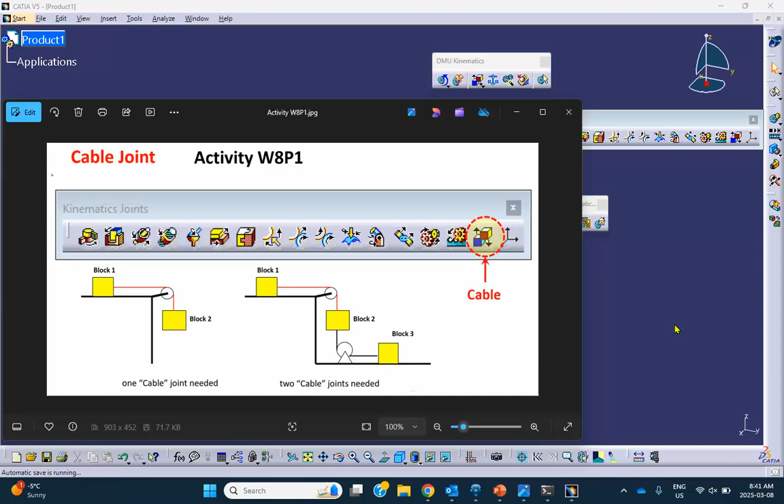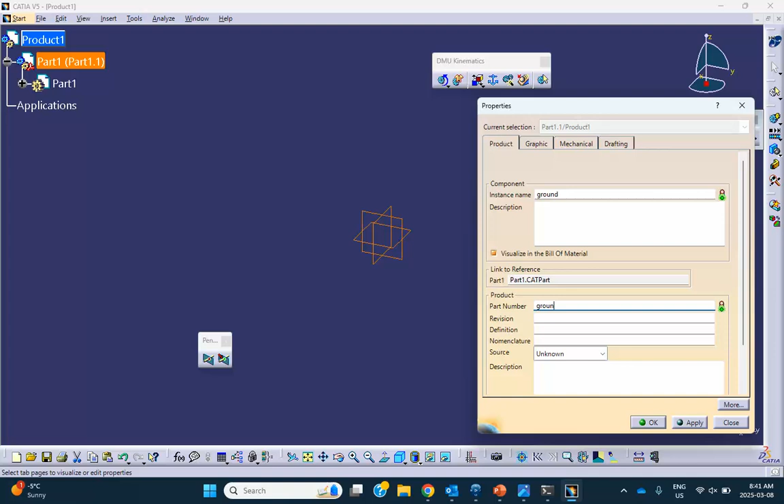So let me insert my first part, insert a new part in there. And I'm going to call this thing the ground, in properties, call it ground. And we're going to make it. So let me double click on it. On this vertical plane, I will sketch something that will be my ground, something like this.

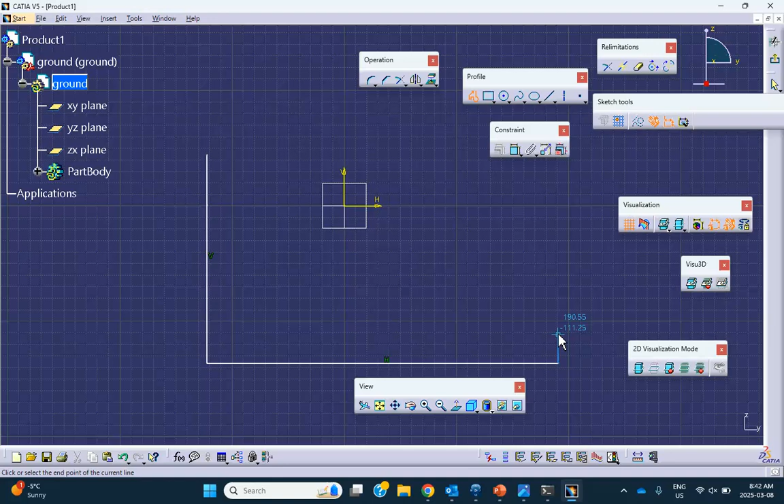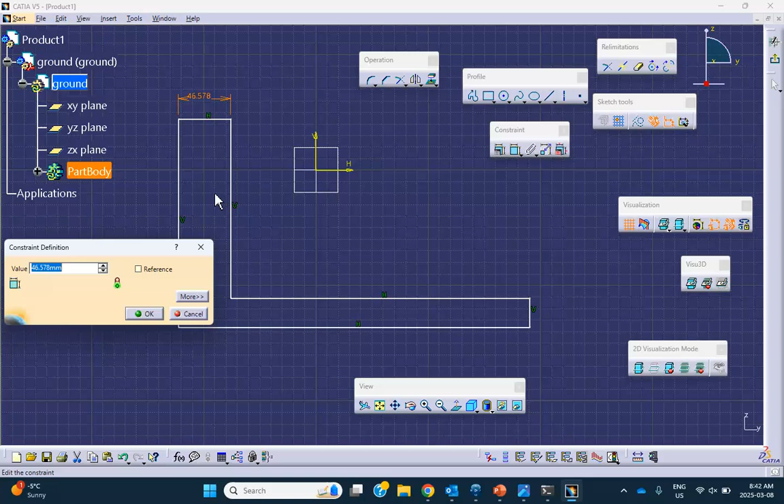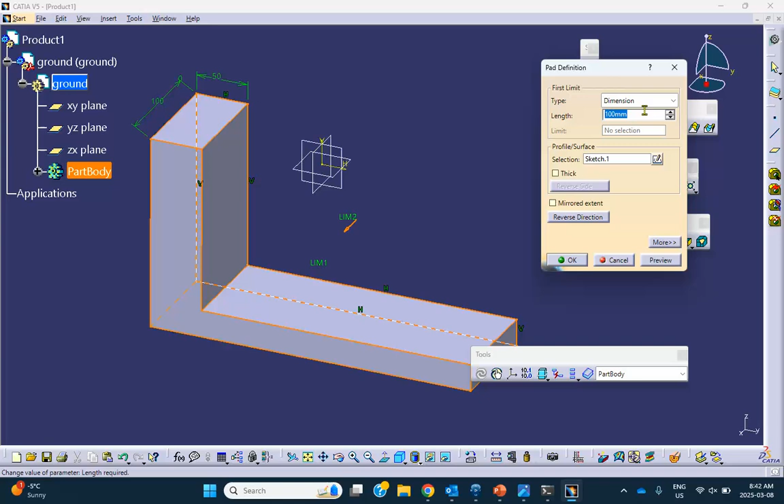And although dimensions are not important, just for my own good, I'm going to put a dimension here so I have an idea of how big this thing is. Okay, it looks like it's 45, 46 millimeter. Okay, I'll make it 50. All right, so this is 50 millimeter, and based on that, we know what these things are. Exit. I'm going to pad it. Let me make it by 100 millimeters. All right, I should make it a little bit longer, maybe 200. All right, good.

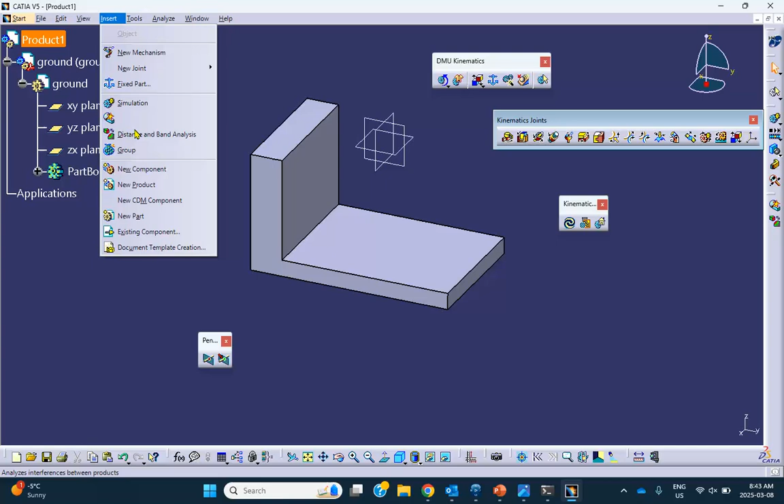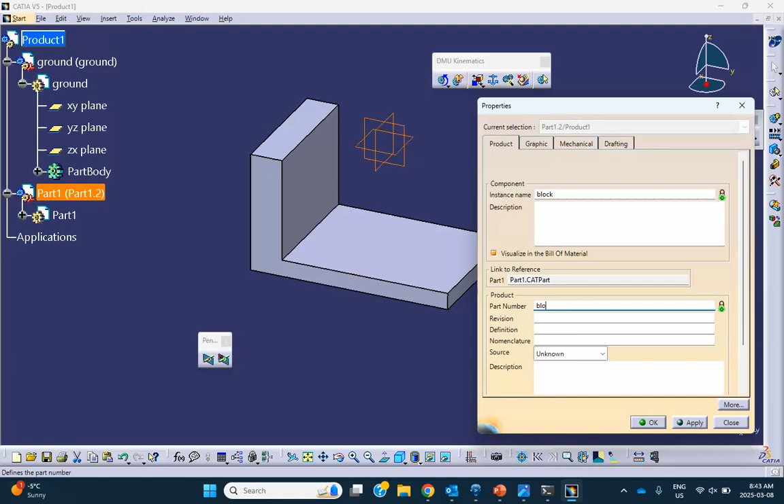So now we go and insert our block. And since they're identical, we're going to make one of them. Maybe you copy and paste it, or do multi-instantiation, whatever you prefer. So insert a new part. Say no, this is going to be the block. Properties. So block and block. All right. Let's go make it.

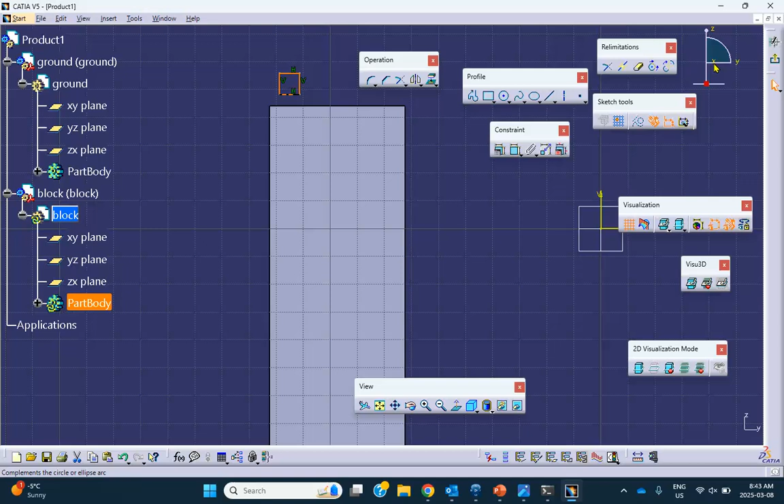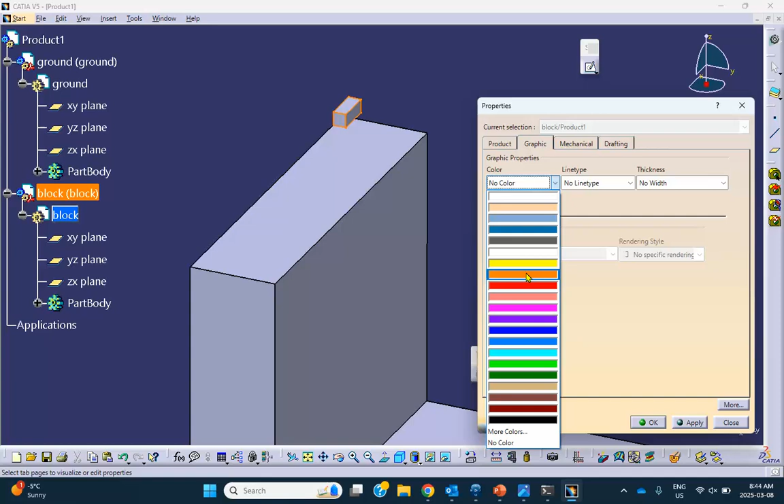Double click on that. On that vertical plane, I will sketch. All right. Something small. Exit. And then we're going to pad it. Fine. That's good. And I'm going to change the color of that. Right click properties. I'm going to change the color to, I don't know, maybe orange, so I can see it better.

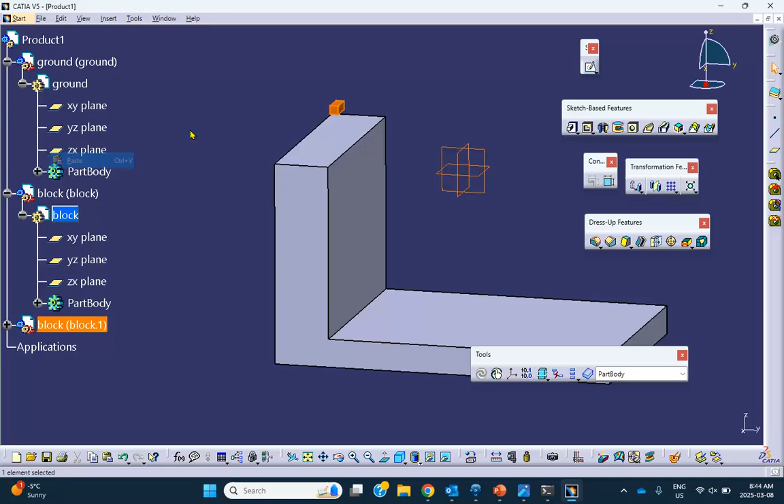Now, I need another one that goes up and down this vertical edge. So let me copy this thing. And I'm going to go here, paste it. They're going to be sitting on top of each other. So let's go all the way to the top. Actually, I'm going to go to the assembly design. Okay, so move them apart. Manipulate, translate it in the direction Y so I can see it.

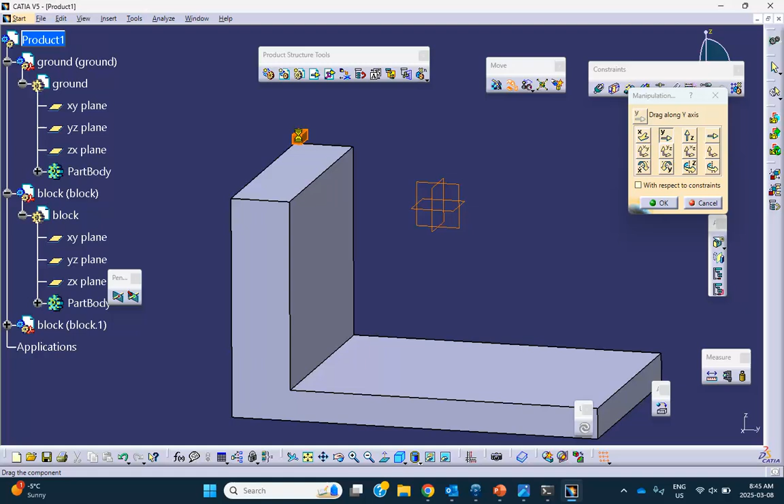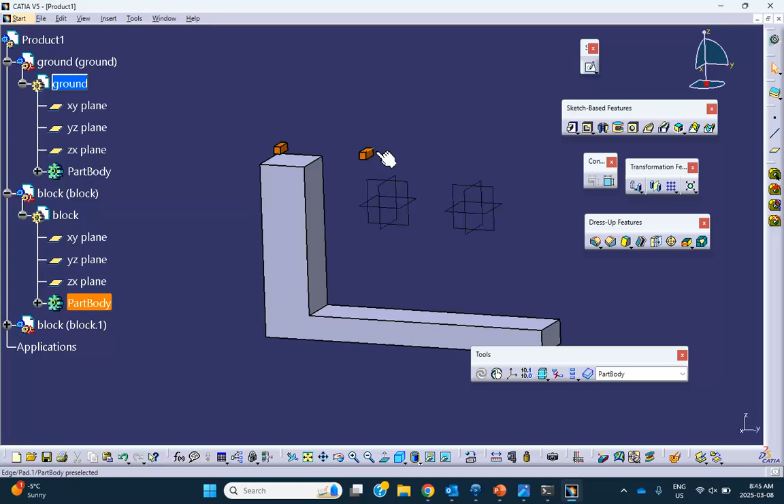There we are. I just noticed that, you know what, this is distracting me. So let me go ahead and make this pad instead of 200, I'll make it maybe 50. I don't know why I made it so long. That's better. Okay, later on, I'm going to create another one of these and use it. But right now we have two blocks. Right now we're doing the one on the left. So

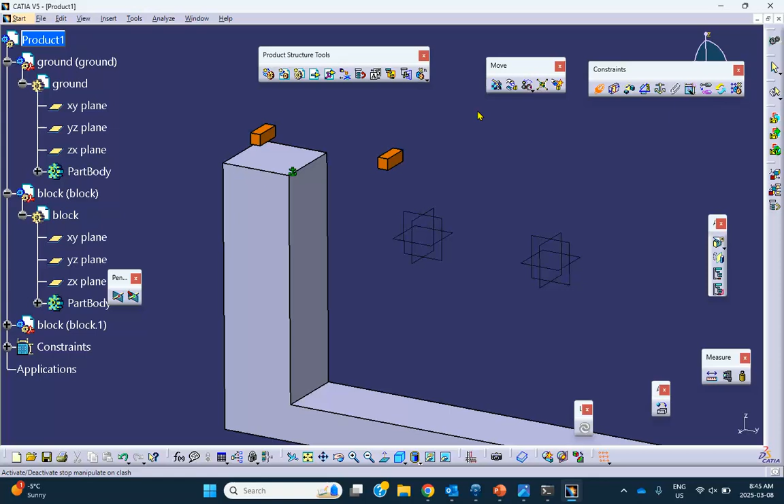we're going to go to the assembly design, anchor the ground, and then we want to have a prismatic between this edge and that edge. So coincidence between this edge and that edge, and coincidence between this plane and that plane. That will turn into a prismatic one. Same thing over here, coincidence between this edge and that edge, and coincidence between this plane and that plane.

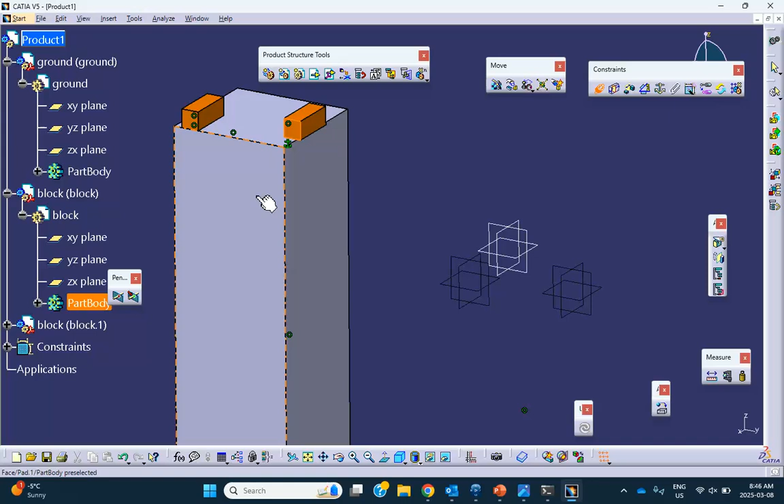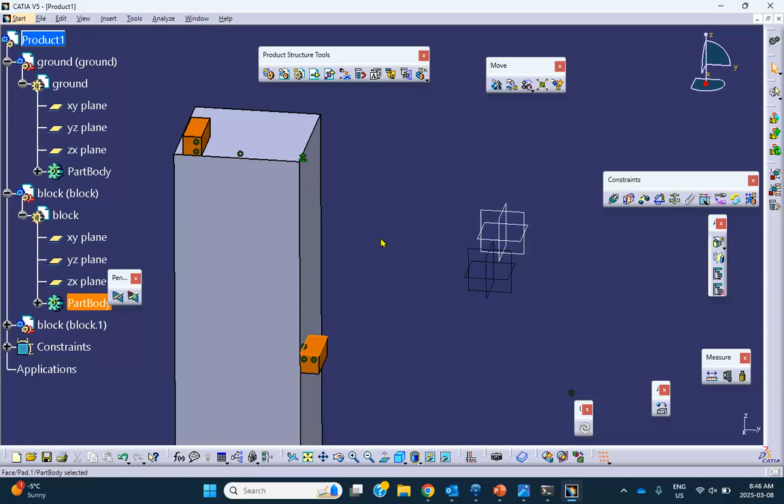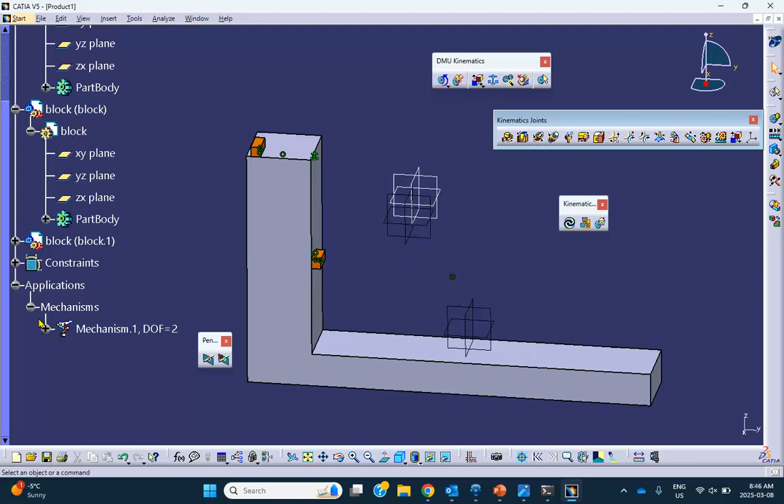Yeah. And then I'm going to move it down a little bit. I can use the compass or I can use the manipulate, whichever you prefer. There. Okay, very good. All right, so let's go to the digital mockup, DMU kinematics, get the magic wand out, new mechanism, auto create, and needless to say, you're going to get two prismatic joints right there. Okay.

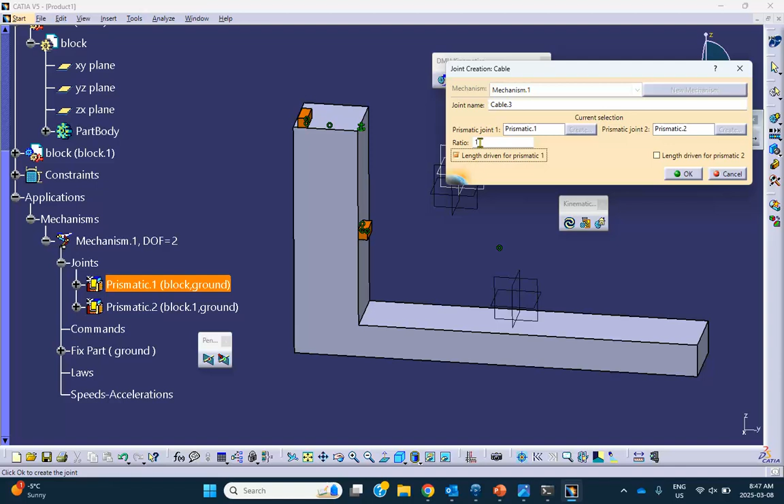We then go and click on the cable joint right there. See that cable? See this in the kinematic joint cable? It asks for two prismatic joints. Well, here's one. Here's the second one. And right now, let's leave everything the same. This tells you which one you want to move. Is it prismatic 1 or prismatic 2? Let's say prismatic 1. And notice that there's a number 1 here. Let's see what that thing means. Say okay.

And let me zoom in a little bit. So there's a sliding bar, and this can go between minus 100 and 100. Let me change the range here so that actually it doesn't go between 100. I'll go 0 to, let's say, about 50, something like that. I don't want to work with 100 and minus 100. Notice that now when you drag this thing, that top one moves between 0 and 50 millimeter. However, they're going in the wrong direction. That's the problem. So what I do is I go back to that cable joint, and instead of plus, I say make a minus 1.

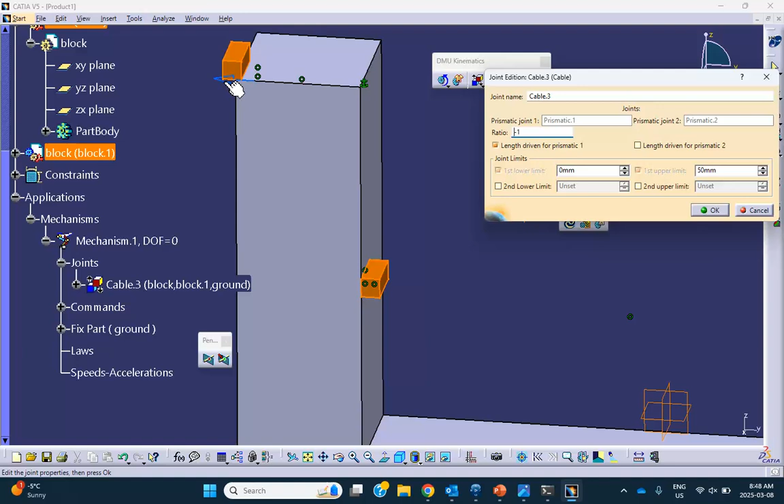And let's try it now. Now they go in the same direction, you'll see. Okay. Except that if I want this thing to go in the other direction, there's several choices. One is, let me reset that. Let me see if I can flip the direction of the prismatic one. No, I can't do that because it's buried in a cable joint, no problem. So you go to the cable joint and you put a flip on that arrow. Okay, very good. And then we say, okay, let's try it now.

There, this is what I want. Okay, very good. Reset. Okay, so by the way, there was a number here. The one means that for every 1 millimeter motion of this, how much the other one moves. I don't want one, so let's make it 10. Let's see what happens. Try it now. Notice that for every 1 millimeter motion of the top one, this one moves 10 times.

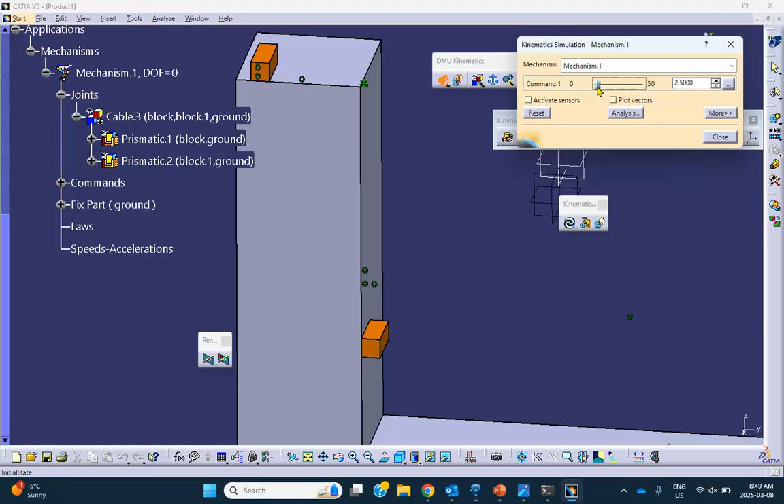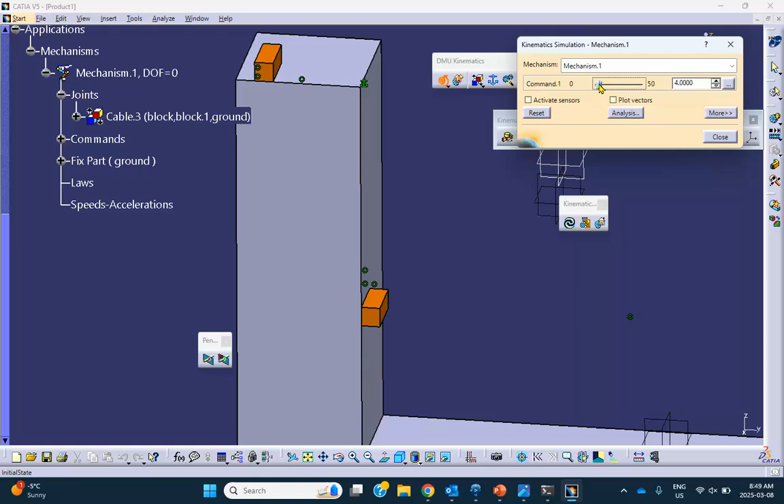Now reset. I don't want 10. Let's go back. Make it maybe three times. So let's try it now. For every 1 millimeter motion of the top one, this vertical one goes by 3 millimeter. You can see that right there. All right. Reset. Good. Now we want to create our other problem. The other problem being this.

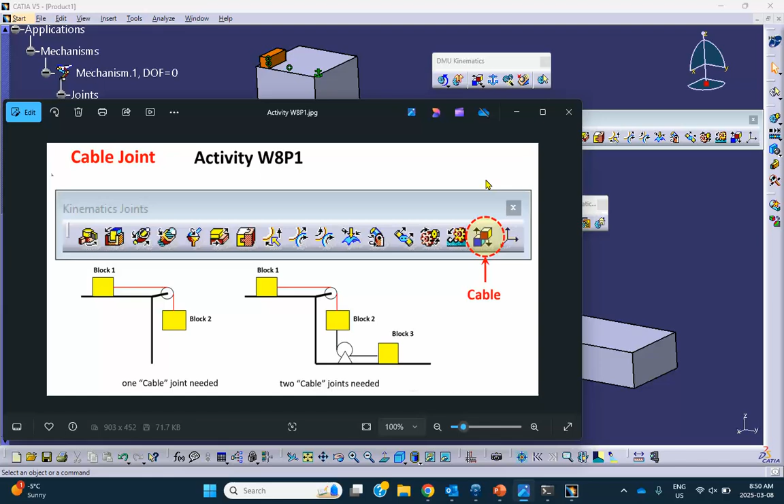Now notice that I need another block, and you can visualize that the cable goes between this and that. But the point is that the cable joint has nothing to do with an actual cable. It has to do with the motion of two prismatic joints. So for example, I can take another block and place it on this edge so that as this block moves down, this third block moves horizontally in the x direction. It can be done. So don't be fooled that the other block has to be a continuation of that. That is not the case, but this is how I'm going to do that for the present problem.

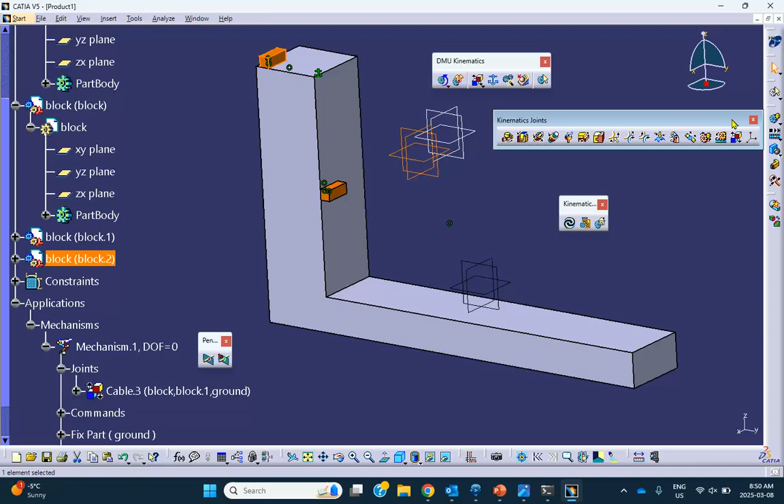Okay. So let me go ahead. I need another one of these blocks. So copy, and I'm going to paste it, and they're going to be on top of each other. Okay. So let me move them apart and use the compass to do that. There we are. I'm going to move it down a little bit. There we are. And we are good. Okay.

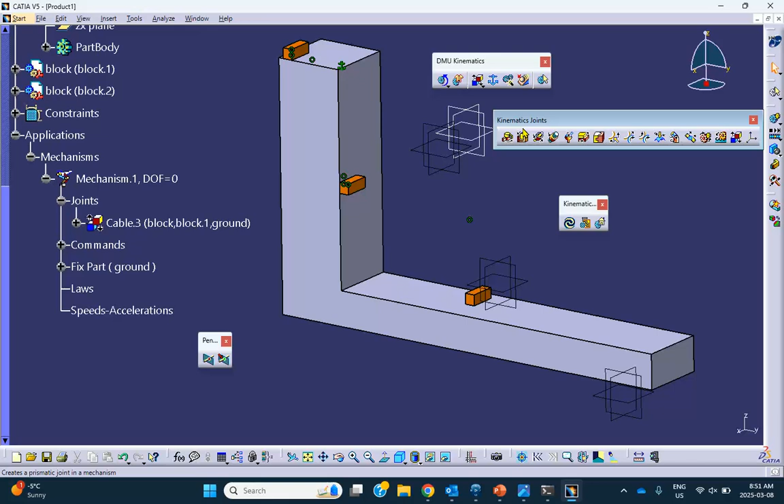So what we're going to do is we're going to try to make a prismatic joint here. I can do that right now. Prismatic joint. See this? Between this plane and that plane. And then we say, okay, there we are. So a prismatic joint has been created. Okay. Now, you may be tempted to say, okay, let's go and create another cable joint. Now notice that I can select this, there's no problem, but I cannot select the other prismatic joint because those are all gobbled up by cable 3.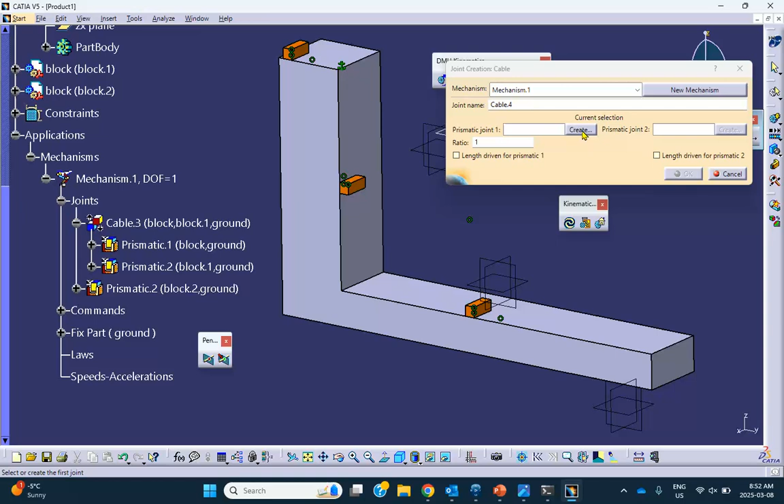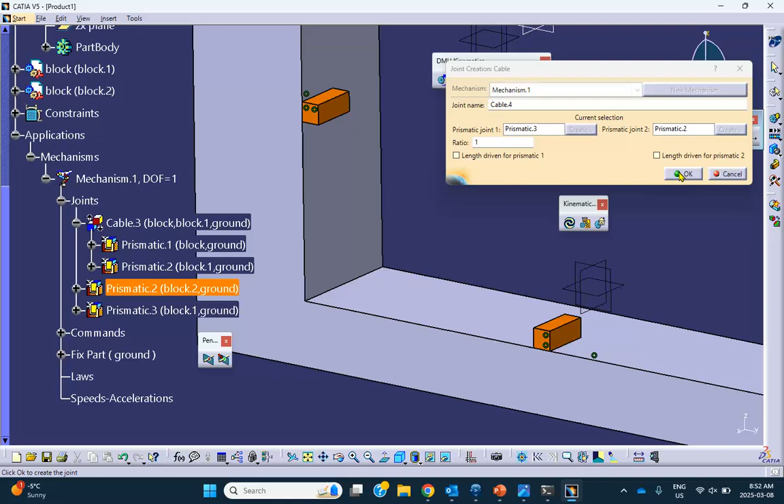So what I can do is I can actually go ahead and create one, and which one would that be? It's going to be between this edge and that edge, this plane and that plane. And the other one, I don't have to create because I already have one right there. This is the one right there. And then we say, okay, we'll come back to these length driven and stuff later on. Mechanism can be simulated, and let's see what happens. So we have a single sliding bar which controls the motion of that top block.

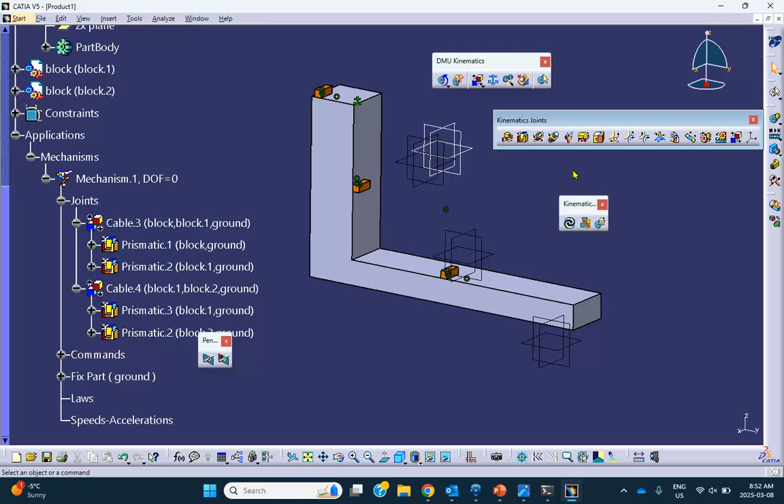Okay, the first two are doing okay. The third one is not because of that ratio being the wrong direction. So we go back, we go to this cable, we make this thing minus, we say okay, and let's try it now. Right. And because that ratio is 1 or -1, every translation of this will produce the same translation of the other one. Now, if you don't want it, go change it.

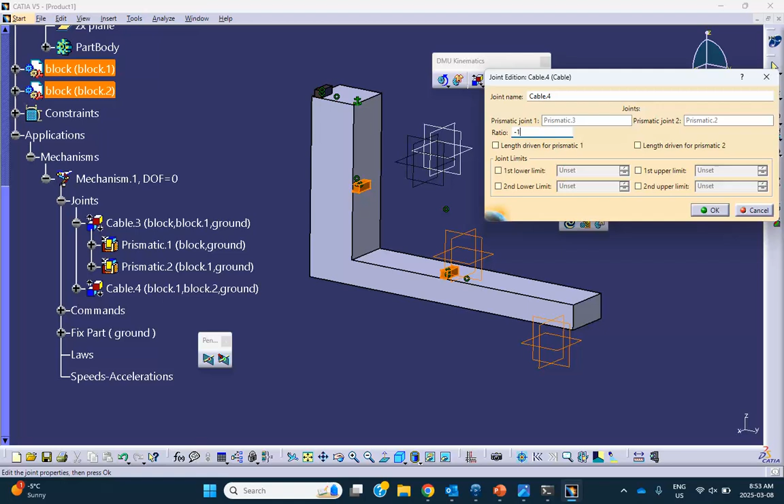So, for example, I can go to that second cable joint. I'll make this thing 10. How about making it 10? Say, okay, let's try it now. Right. Every 1 millimeter of that, make this thing go by that ratio that I put in there. I can't remember what it was. And every motion of this is going to give you 10 times motion of that one.

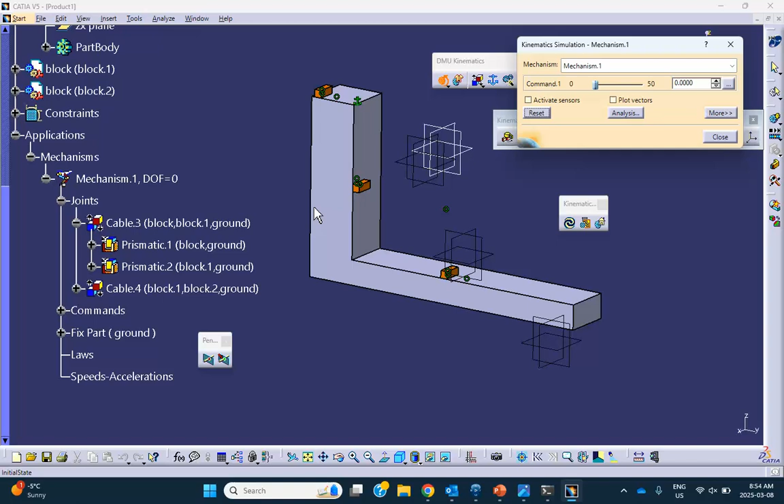Now, keep in mind that this block, I could have put it on any direction in a sense that I could have created that prismatic joint on the slanted line, etc., and it makes no difference. So basically, a cable joint tells you that when one prismatic joint takes place, the other one should take place in any direction that we have, it doesn't matter, and by the ratio of the value that you put in there. And worry about plus and minus if it's not moving in the right direction. Good. That's pretty much it.